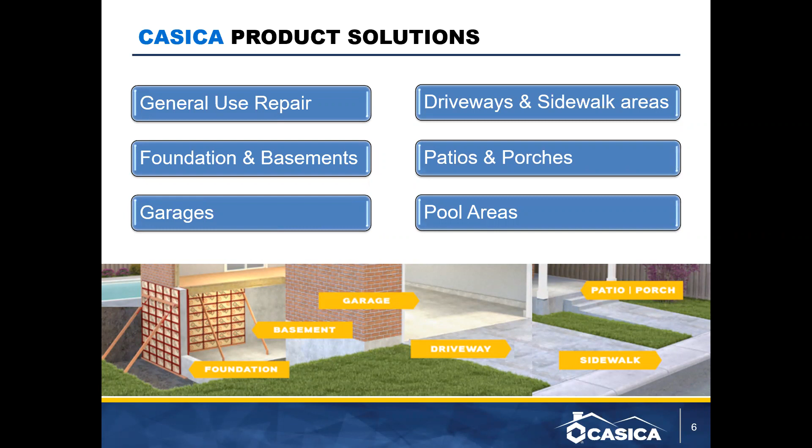Before we dive into some of the chemicals, I wanted to touch on our accessories briefly. With the launch of Casica, we've added 5 new accessories to our product lineup.

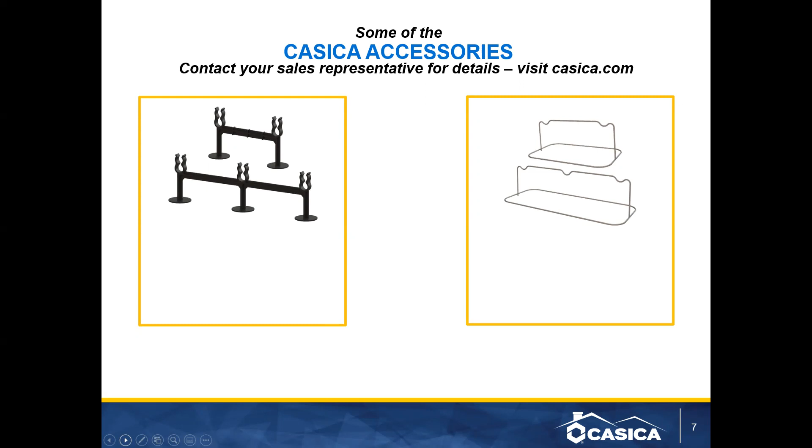We now offer 2 types of chairs for supporting rebar in footers and trenches: the CR400 foundation chair and the CR400 rod chair. Both chairs eliminate the use of tie wire and keep your rebar elevated for concrete pours. The plastic CR400 foundation chair is corrosion resistant and offered in 2 or 3 bar configurations. Rebar up to size 5 will simply snap into place.

The rod chair has the ability to accommodate any size rebar and provides a wide, sturdy base for more support when working on uneven surfaces. The rod chair also comes in 2 or 3 bar configurations.

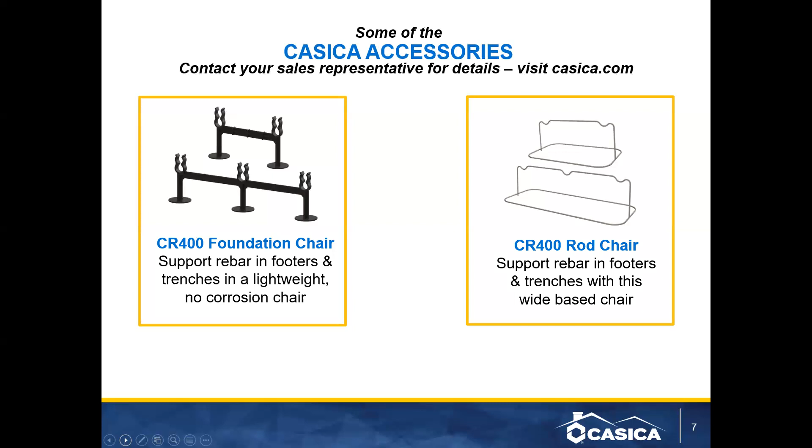The CR200 wedge anchor is a great post-installed anchor for safely securing different objects to concrete surfaces. It's coated in zinc that makes it corrosion resistant, and the slight winged expansion wedges into that concrete base, creating a nice solid anchor for any fixture.

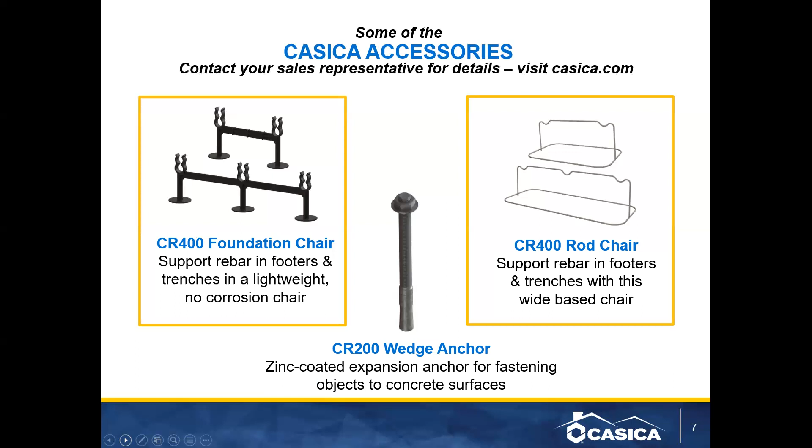Our other 2 new additions are the CR600 metal lath sheet and the CR700 aluminum form ties. The CR600 is used for adhering stucco to walls and ceilings. It's galvanized to also prevent corrosion. The sheet is self-furred or dimpled to allow for the best adhesion.

The CR700 aluminum form ties are used for securing aluminum forms during pours to achieve your desired wall thickness. They're made in both full and nominal variations, ranging in size from 6 inches to 12 inches in length, and they break off easily. Those little divots are where the breaks can happen, as well as using it to suspend rebar in place. They carry an ultimate load of 7,500 pounds.

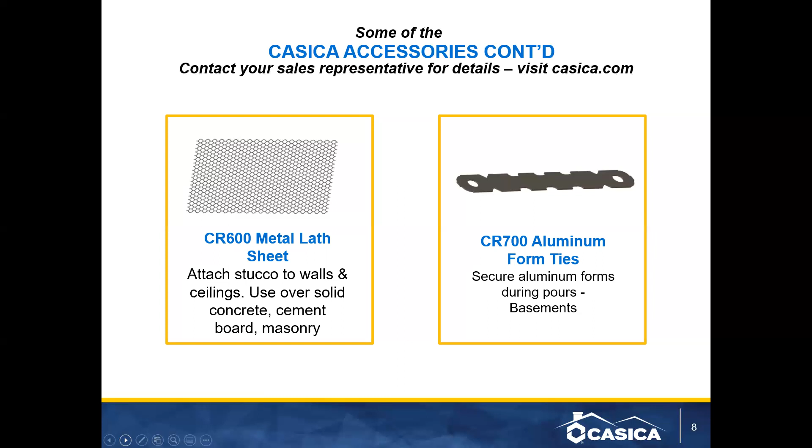Now let's dive into our new chemicals. These 5 new repair and restoration products actually bring 2 new chemistries to our product portfolio: acrylic latex and modified silane hybrids, also known as MS or polyether hybrids.

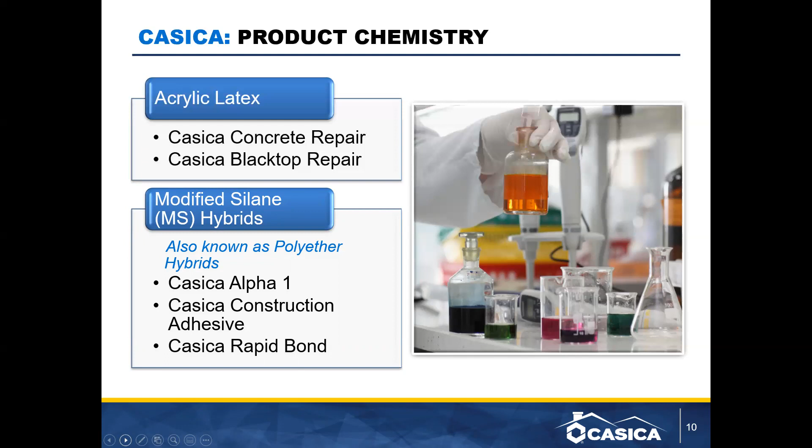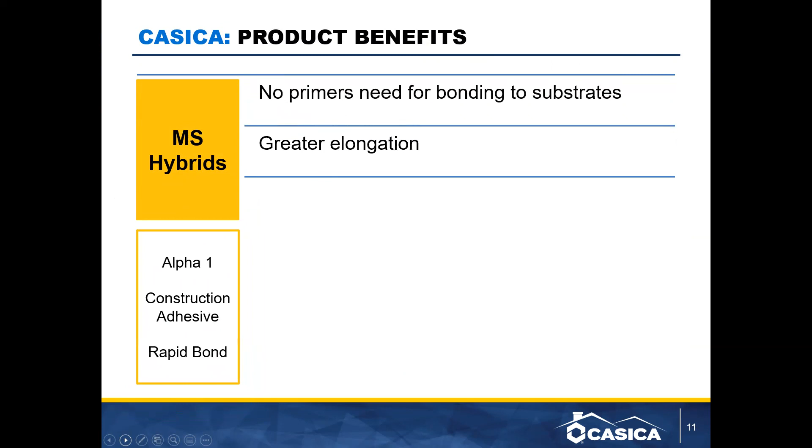Both of these chemistries offer great benefits compared to your typical epoxies or polyurethanes. The MS hybrids are going to have really great elongation and tensile strength, while also maintaining better flexibility at low temperatures due to their temperature and weather resistance. On top of that, they have excellent water or moisture resistance. The MS hybrids we're introducing are the Alpha One, the Construction Adhesive, and the Rapid Bond.

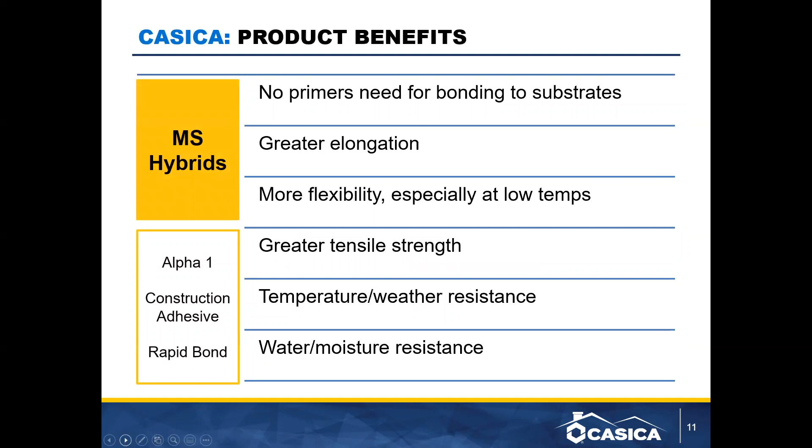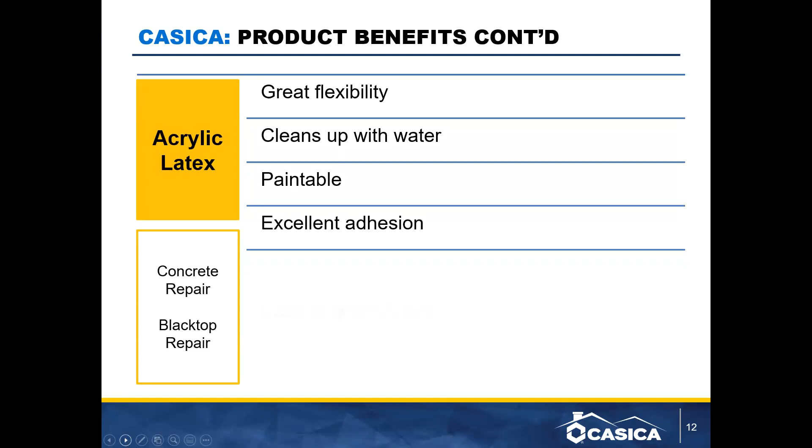As I mentioned, we also have acrylic latex products. These products are the Concrete Repair and Blacktop Repair. They have great flexibility and excellent adhesion while being easy to apply, and they clean up nicely with just water. They're long-lasting without the worry of expanding or contracting with changes in the weather, and they're paintable to match whatever surface on which they're applied.

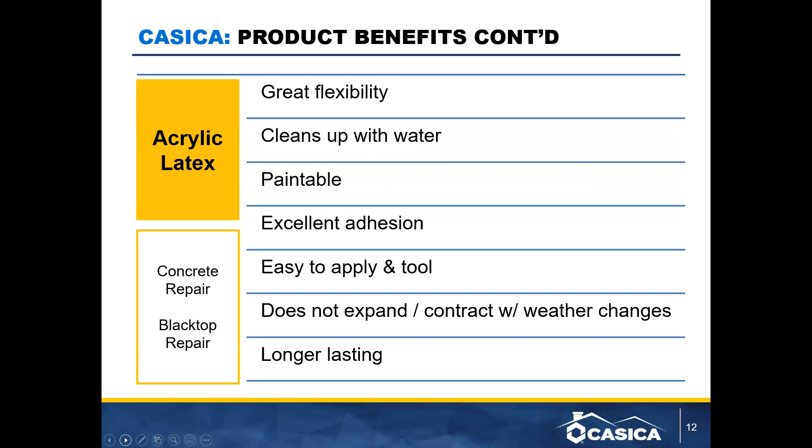So getting into the actual products, we can break them into 2 different categories: repair and restoration, and bonding and sealing. First up under repair and restoration is our Concrete Repair.

It's a concrete crack filler used to repair a variety of both vertical and horizontal surfaces. The non-sag formula offers a sanded texture, so it blends nicely with surrounding surfaces, and it can fill narrow cracks up to 3/8 of an inch in width and depth. You'll use this repair on both interior and exterior projects to repair cracks in foundations, basements, sidewalks, patios, porches, driveways, anywhere you've got cracks in concrete surfaces.

If you use too much or it gets a little messy, you just clean it up with water.

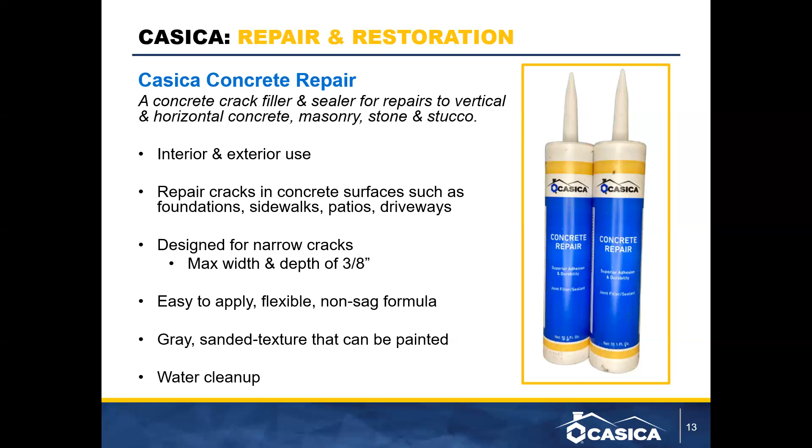Similar to the Concrete Repair, Blacktop Repair fills and seals cracks on blacktop or asphalt surfaces, such as driveways, while also providing that sanded texture to blend in naturally. It's also designed for narrow cracks, with application ranging from 1/8 inch to 3/8 inch in thickness. No mixing required, and easy water cleanup makes it convenient to use. Both products offer that flexible but durable sealing property that's common of the acrylic latex chemistry.

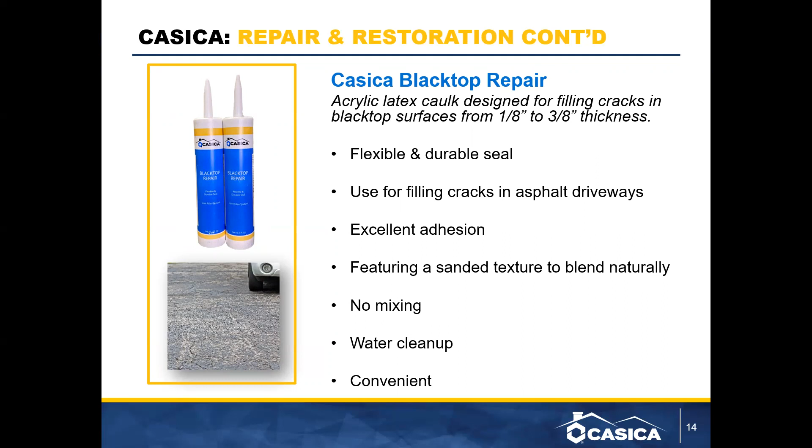Dayton Superior has a really extensive portfolio of existing repair and restoration products to bundle with the new Casica products so that you can create a complete solution for anything your job might need. This includes crack injection and anchoring epoxies such as our Propoxy 100, the Propoxy 300 Fast, and the Propoxy 400. We also have a self-leveling MS hybrid for creating waterproof joints in horizontal substrates called Profil SL.

We have a wide range of repair mortars, looking at our Recrete 20-minute. We've got our Sure Finish if you're looking for any interior or exterior concrete wall surfaces that need to be coated without any priming or to repair any of those damages. And we also have a variety of self-leveling underlayments to put down before your flooring is laid.

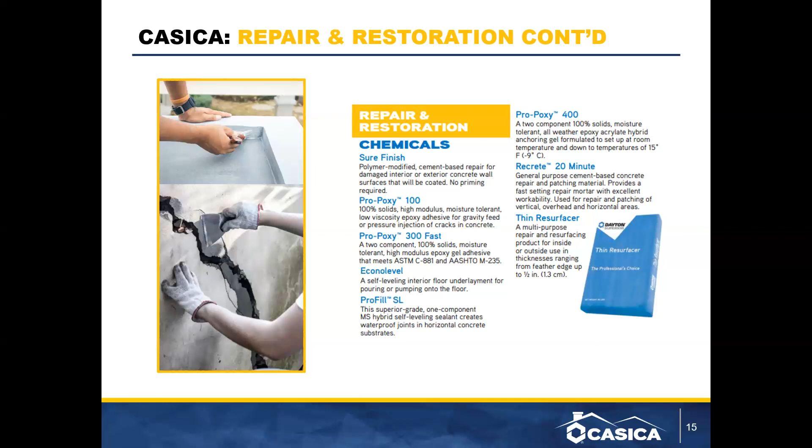Next up, we have our bonding and sealing category, and we're going to start with our Alpha One. This is looking at our new MS hybrid or modified silane products. With our Alpha One, we've got a one-component non-sag hybrid sealant for maximum adhesion between a variety of surfaces.

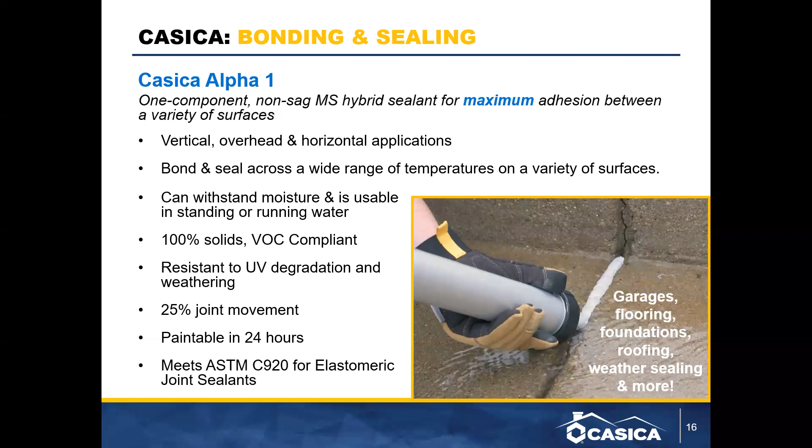Moving on, we have construction adhesive. As it sounds, construction adhesive is an all-purpose construction adhesive for creating strong bonds between common building substrates such as concrete, wood, and metal, and it even bonds with EPS or styrofoam insulation.

It's got immediate green strength, which makes it a great adhesive for installing subfloor, countertops, and shower panels, things that you want to get adhered quickly and move on with your job. While its temperature and water resistance allows it to also be used outdoors on roofing and landscaping applications.

Unlike water-based or polyurethane adhesives, the MS hybrid chemistry of the construction adhesive means there's no outgassing, bubbling, or washing off that will occur with your project. Again, this one is also going to be able to cure properly when used around wet substrates or where water is present.

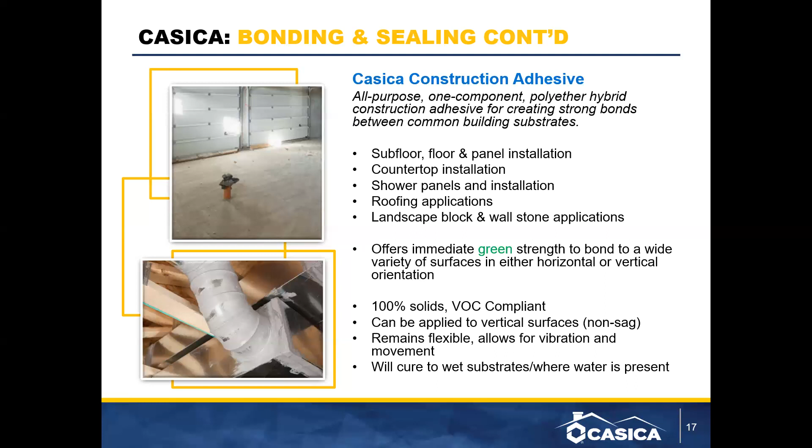And lastly, we have our Casica Rapid Bond. The Rapid Bond takes the great properties of the construction adhesive, but it's going to speed up the adhesion time and that strength gain. So it allows for really quick bonding.

Say you're hanging a mirror and you don't want to stand there and hold it while you're waiting for your bond to form. The rapid bond is going to have that immediate green strength, and you're not going to need to use braces or fasteners to get the job done.

Similar to your construction adhesive, you're going to be able to use it on subfloor applications, shower panel applications. It's going to be great for anywhere you need something bonding in about 10 seconds or less. Depending on the weight of what you're bonding, the heavier it is, the longer time frame it's going to take. If you're bonding something with a lower weight, it's going to bond within about 10 seconds.

Say you're looking at even just a simple CMU block, you all know how heavy those can be. You can bond two of those together in about 10 seconds. You don't have to worry about those braces or fasteners.

This one also bonds common substrates that you normally see, your typical concrete, wood, and glass, but it also works well on ceramics, fiberglass, anything with HVAC systems, PVC, and EPS or styrofoam insulation. So it's going to be a great alternative for construction adhesive if you need something that's going to bond super fast and you don't have time to stand there and hold it in place, or if you don't have the resources such as braces or fasteners to hold it there while you walk away and get something else done.

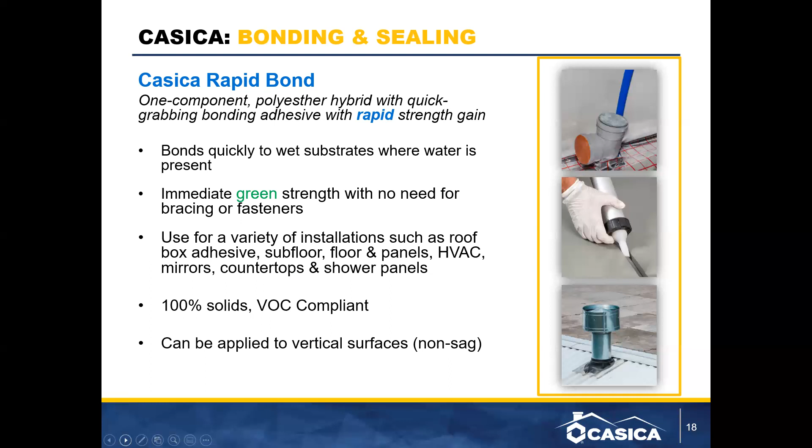We've talked a lot about our products today, lots of information, lots of new chemistries between our accessories and chemicals we've added to our line. If you're looking for more information, we have a wide variety of resources available to you. We always suggest that you be sure to read the technical data sheet as well as any safety data sheets. They're all available on our website.